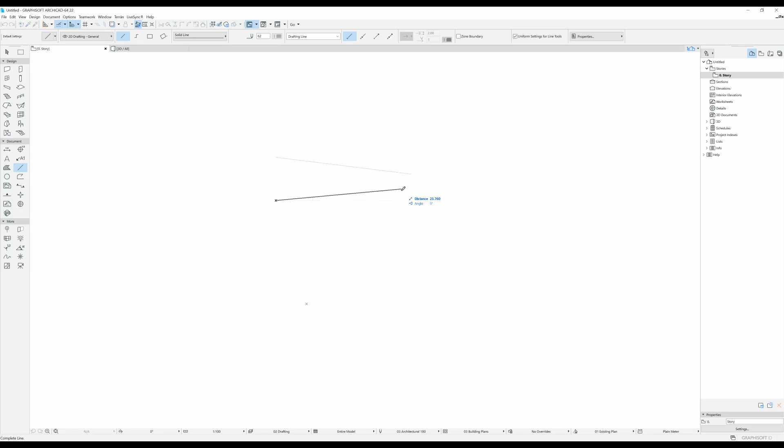The first thing we need to do is make sure you have your line tool selected with the single geometry method. Let's draw some lines: one click here, then again one click here, and now we'll draw the third line, which will be the reference by which we split these other two lines, with one click over here and one click over here.

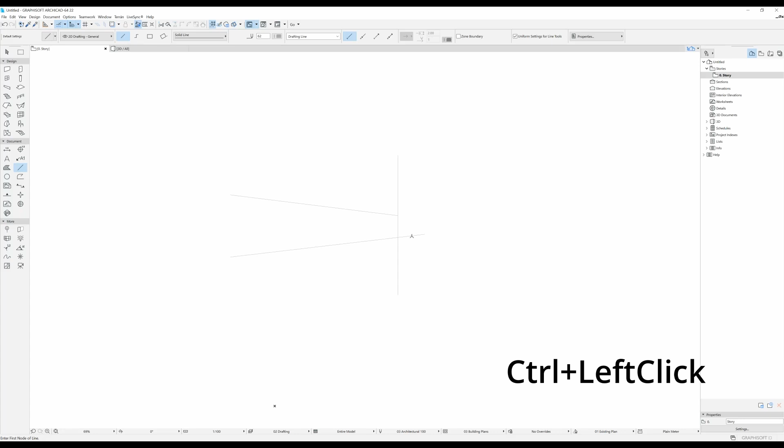One way to do this, which I use when I only have to trim one or two lines, is hold down the control button and click, and now this line is trimmed all the way to the other line. That is one way to do it.

But if you had way more lines to trim, that would take too long. So another way is to select these two lines and select your split tool, then do one click over here, one click down, and the third click on the side you want to delete. Then hit delete, and delete this line if you don't need it.

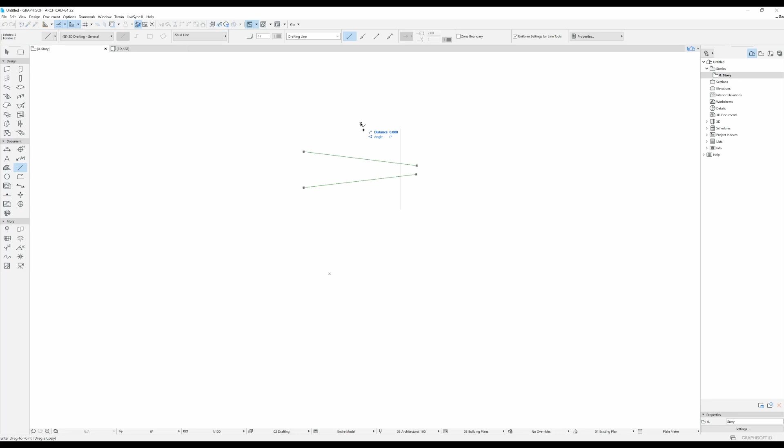I'm going to show you the same thing if we have multiple of these lines. Let's drag a few copies downwards. You can still use this reference line, it doesn't have to be across all of the other lines. You can just leave it as it is. Select all of them and then do the same thing.

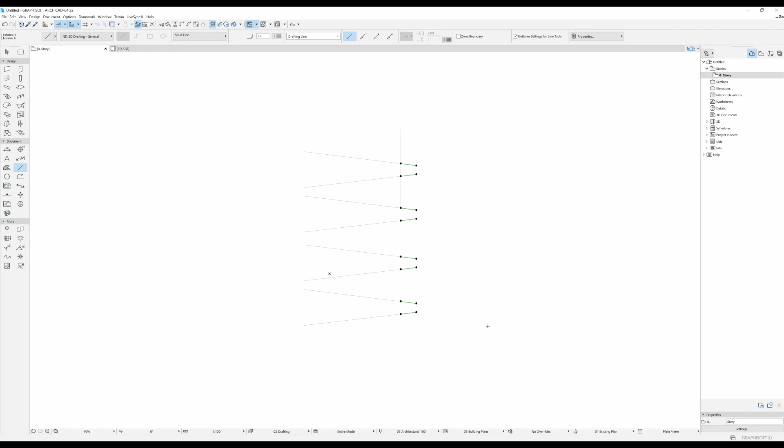Split, then one click over there and the second one downwards, and the third click to the side you want to either move or delete. You can do whatever you want with this side. Let's delete them in this case, and you don't need this line for anything other than the first click. So this could be like this over here, and you could do the same thing: select these lines, select your split tool, draw downwards, and then delete. This is, I think, the most basic situation.

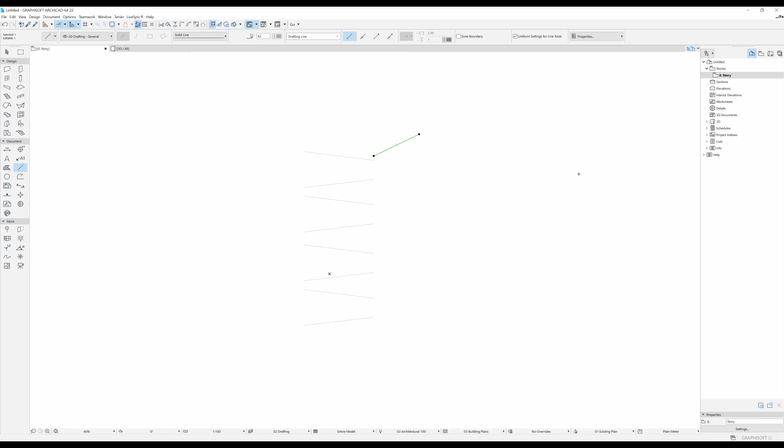Another way to trim lines to get them the same length is to use the adjust tool. I'm going to delete this one and draw one line over here. If I select all of these and click on the adjust tool, and then click on this line, all of them are lengthened up to the point where they meet this line.

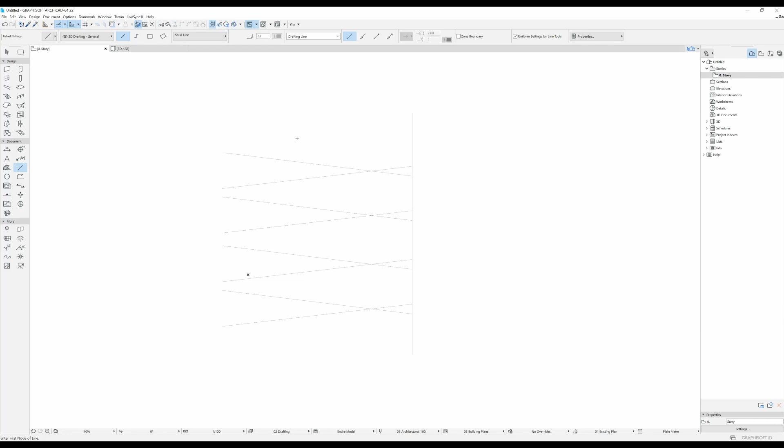One thing to keep in mind is that in order to use either the cut or the split tool, you have to make sure your elements are not grouped together. I'll show you over here: if I use this other geometry method, which is the chained method, and draw a bunch of lines...

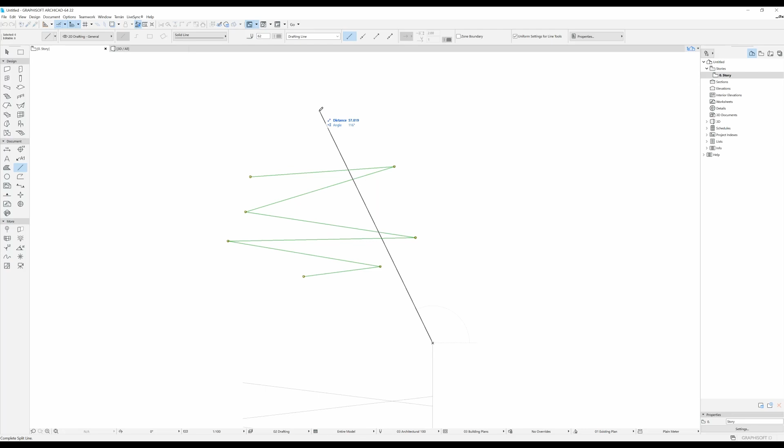Let's say our groups are unsuspended, so when we select one, all of them get selected. Then if we try to use the split tool, we're not going to be able to do it.

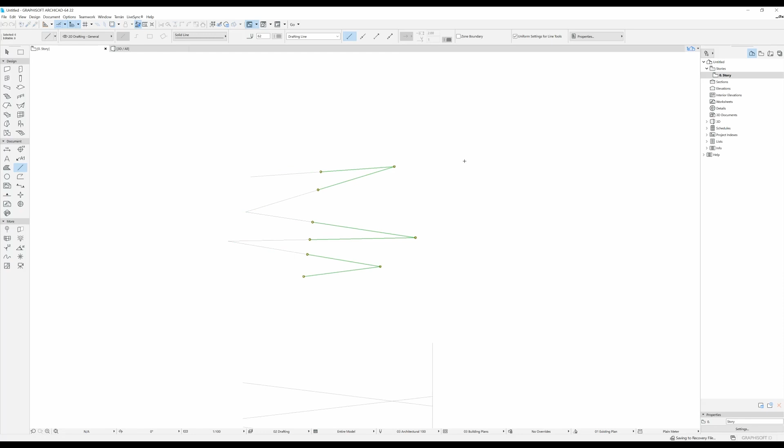You can tell your groups are not suspended if once you select your line, all of the lines in the group get selected. If this happens, you have to suspend the group by pressing Alt and G, or this button here, and then do one click here, one click here, and the third on the side you want to split it. Now you can do it.

So that is basically how you use the trim, split, and adjust tool in Archicad. Keep in mind you can use all of these tools with all of the other elements in Archicad, so you can use them with walls.

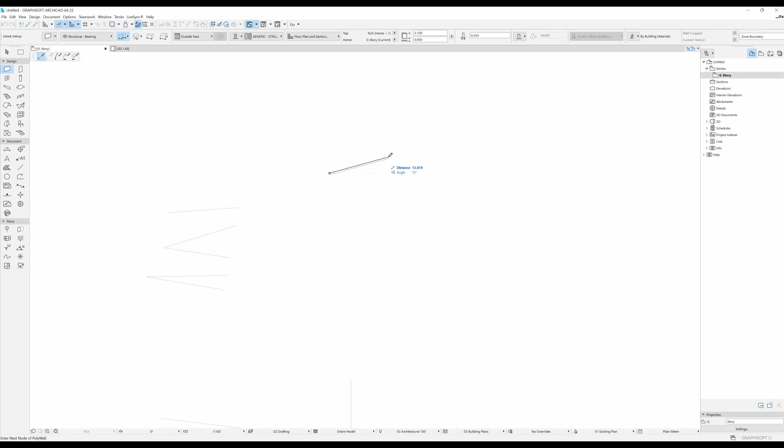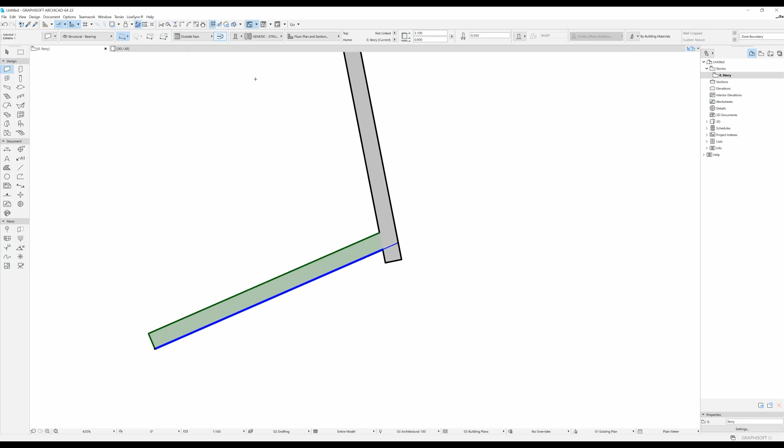If you have your wall tool selected and you have one wall like this, one like this, and one like this, and you want to cut these excess walls, you can just control-click each of these ends and the wall gets trimmed. If the intersection doesn't work right, you can just change this reference line location and cut again, and now the intersection line looks nicer.

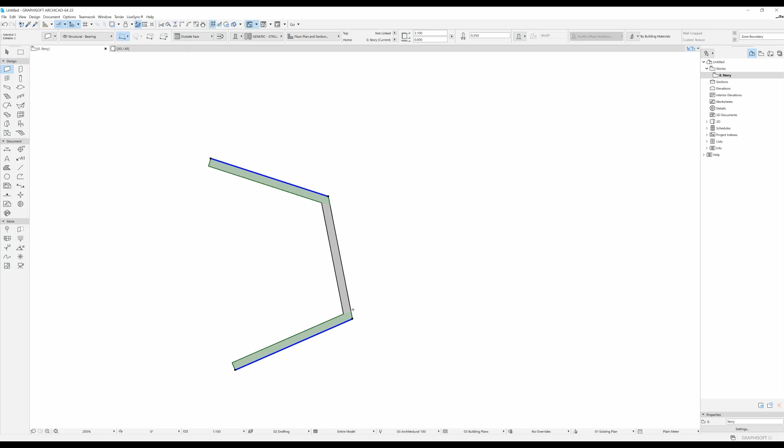Or you can use the other two methods. Let's say we have them longer again. You can select them and use the adjust tool, then click on this line here so it automatically gets trimmed. Or you can also use the split tool, do one click here, and then they get split.

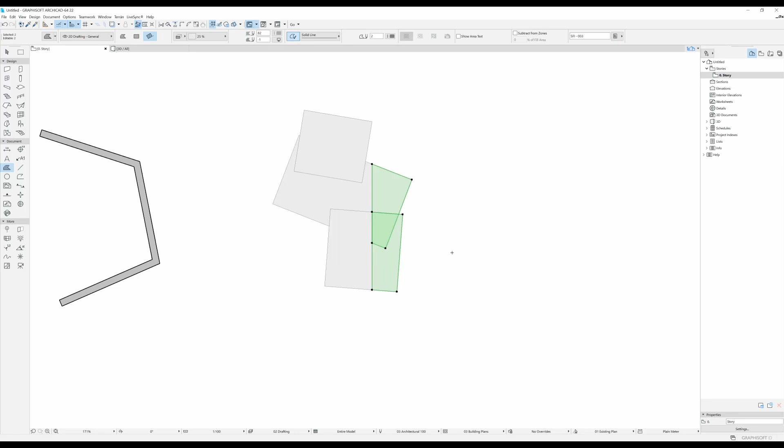You can do the same with fills, so let's draw a bunch of fills. If we select them all and use our split tool, you can do one click over here, one down, and then delete the excess. But for fills you can only use the split tool, you cannot use the trim tool or the adjust tool.

The same thing applies with beams and all the other elements in Archicad. You can use the adjust tool for some of them, the split tool for others, and the trim tool for others. You just have to make sure when you want to use these tools that your groups are suspended. If you keep trying and Archicad doesn't let you, most likely your groups are not suspended.